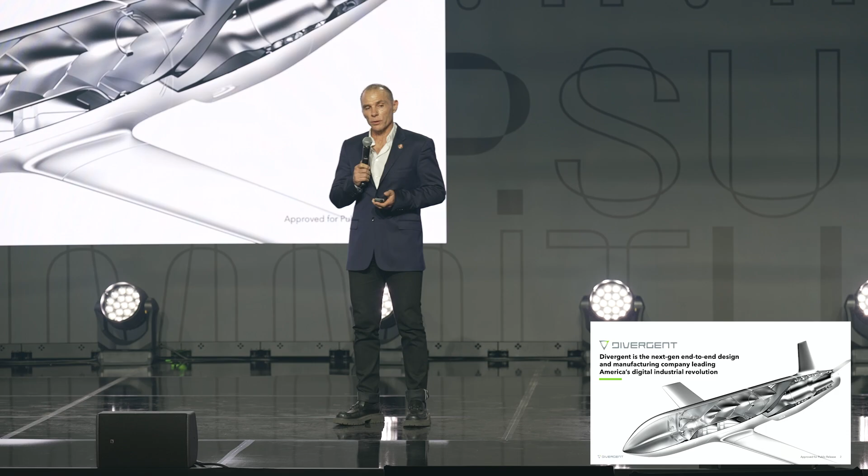It's been commercialized first in automotive with 6 automotive customers that we have: Aston Martin, Bugatti, Ferrari, McLaren, Mercedes-AMG, and Porsche. And today we have, for the most critical safety structures of their cars, structures out on Aston Martins, out on Porsches, and out on Ferraris.

And then all 6 companies will have vehicles out on the road with parts that were generated using a machine learning-based system, fully engineered by that system, 3D printed by machines that we build in-house at a rate that's, I'd say, 10x plus from a cost productivity standpoint better than the most cutting-edge available 3D printing technology.

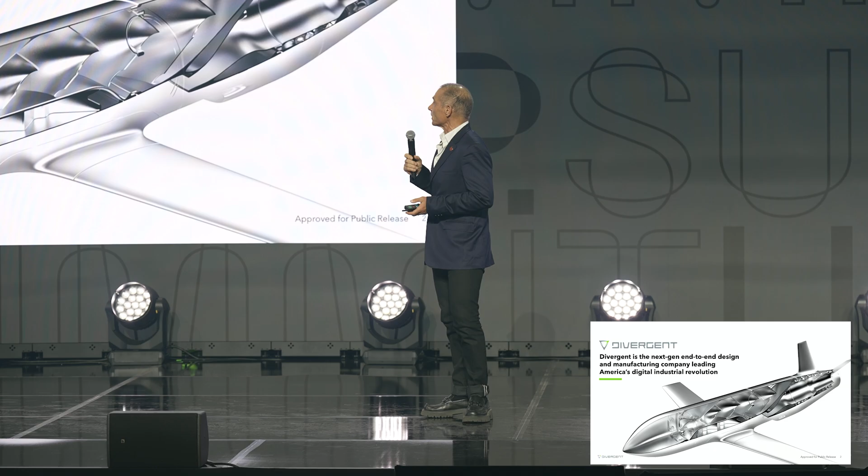And because we design the assembly structure into the structures themselves, we can use the same robotic cell to assemble whatever we print in one end-to-end system. And so Divergent is, in our view, the next generation end-to-end design and manufacturing company that can distribute and scale manufacturing across multiple industries. But our focus really is starting with auto and aerospace and defense.

Recently, we closed a $290 million financing for our Series E. Over a decade, I've raised about $1 billion in capital. It took about $500 million to build the initial system and about another $200 million to commercialize it in automotive.

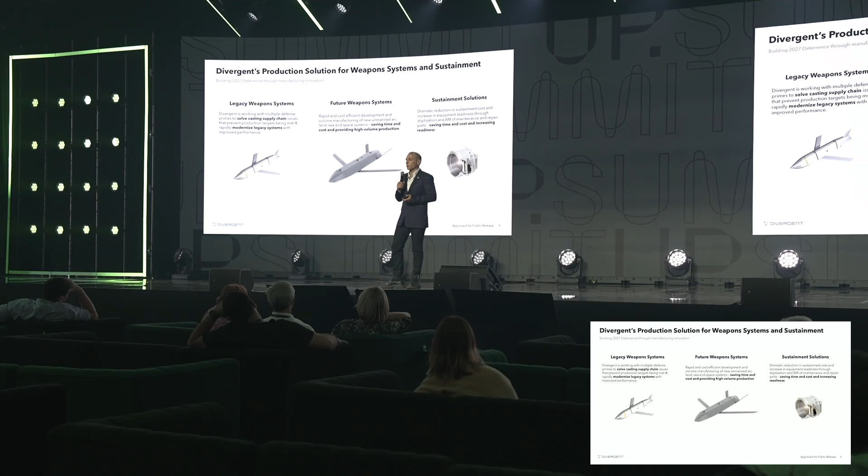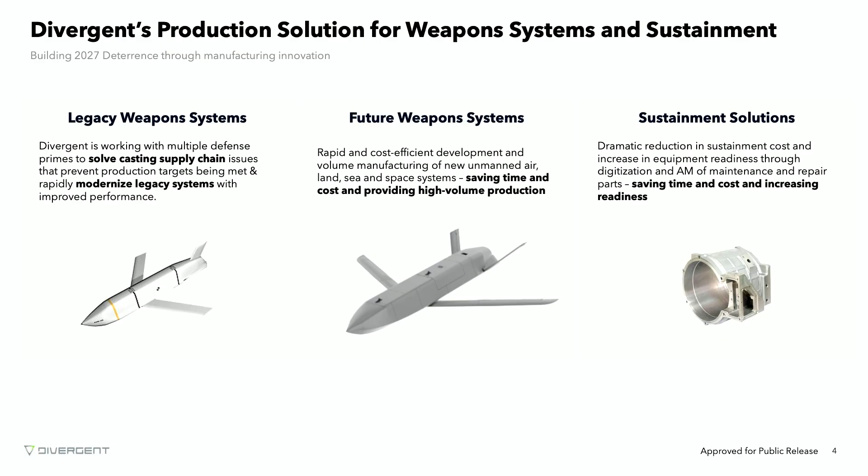We're working across 3 different pillars. One on legacy weapon systems with companies like Lockheed and RTX. We're redesigning existing systems, re-engineering them so that we can, at real volume, then print and scale production of those. On future weapon systems, we're working on unmanned air, land, sea, and space vehicles, some of which I'll show you in a second.

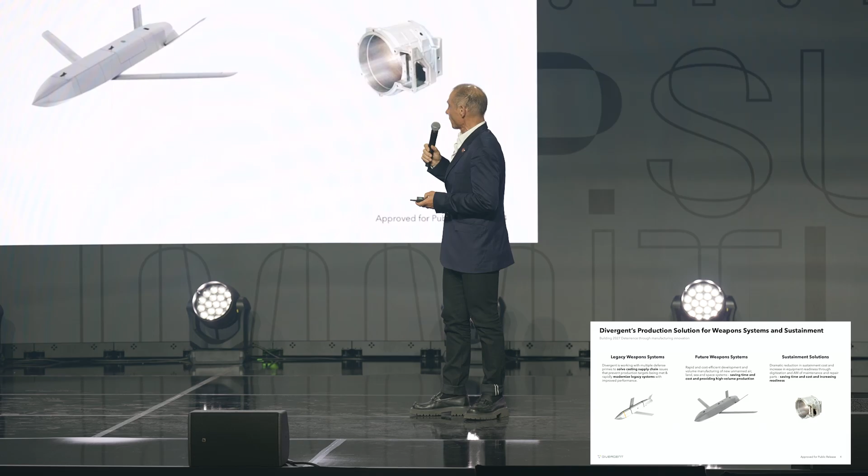And on the sustainment side, obviously there are many, many parts where casting companies that were manufacturing them no longer exist, both here and in our NATO allies where we sold old equipment. We can very, very rapidly, say in 24 to 48 hours, re-engineer those, and then in any machine that we have, be able to produce those in any quantity, from 1 to thousands. So those are the 3 areas we're focused on in aerospace and defense.

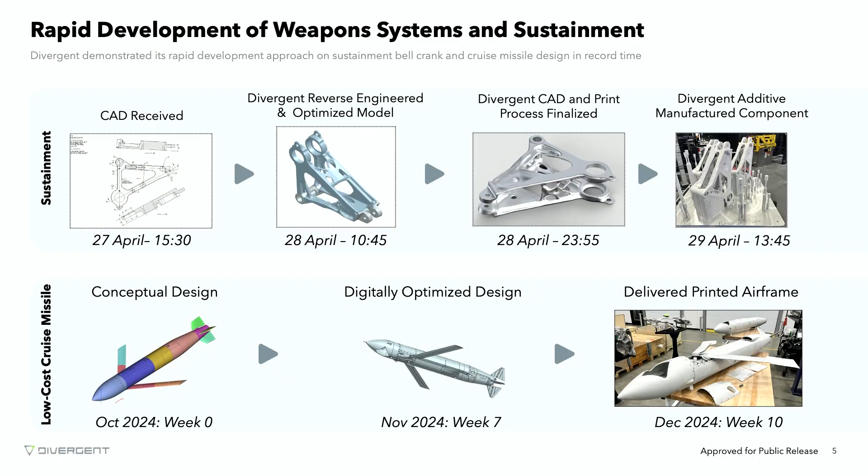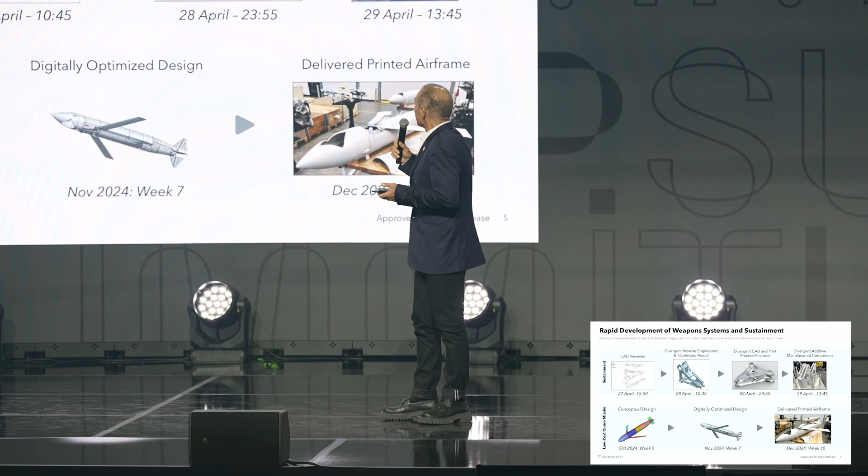These are 2 examples. One on the top is sustainment. So a bell crank for a C-130 tail rudder. They could not find a vendor to cast that over a 3-year period of time. You know, in desperation, AFSOC, Air Force Special Operations Command, came to us. In 1 weekend, we re-engineered that, manufactured, and shipped that to them.

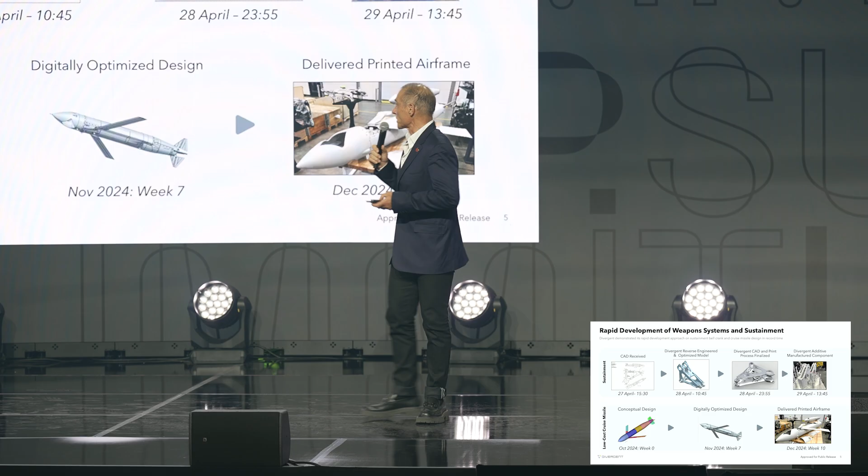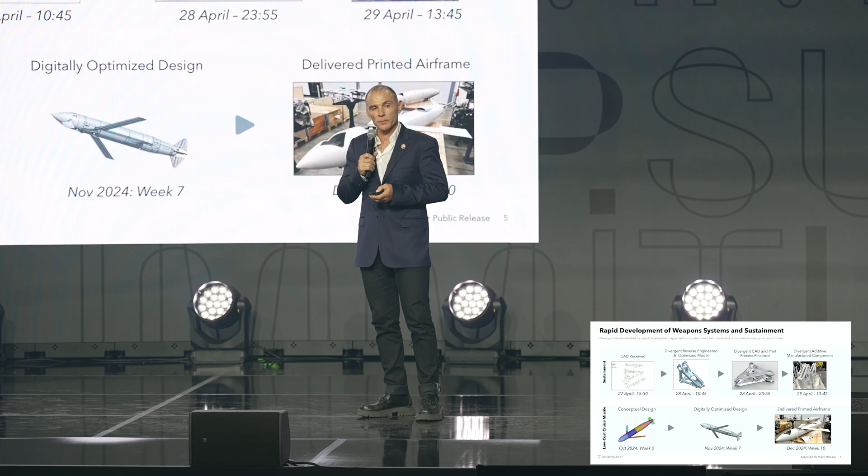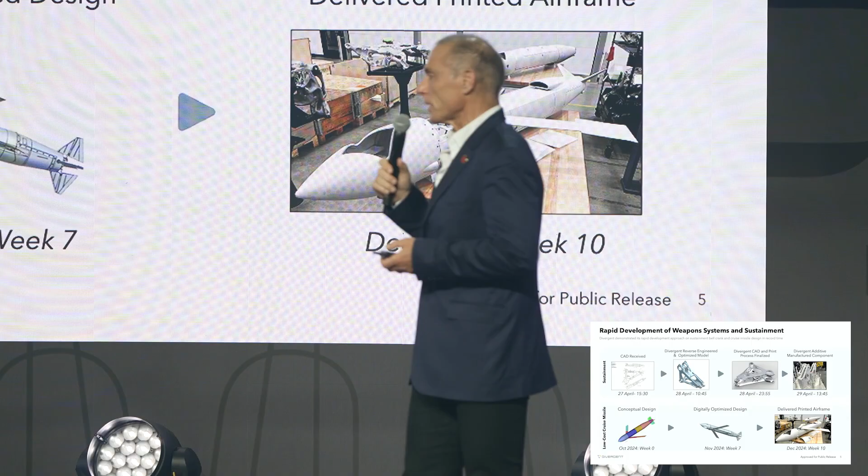As I said, anything that gets generated on the system can be printed and assembled by the same machines. The bottom example is on a low-cost cruise missile system for one of the major primes. From the start of engineering, and usually this is a couple-year timeline, we went from T0 of engineering to delivering a test-ready airframe, and we're doing everything from warhead without the energetics, full missile body, wings, empennage, all generated by an AI-based system and printed and delivered within 10 weeks.

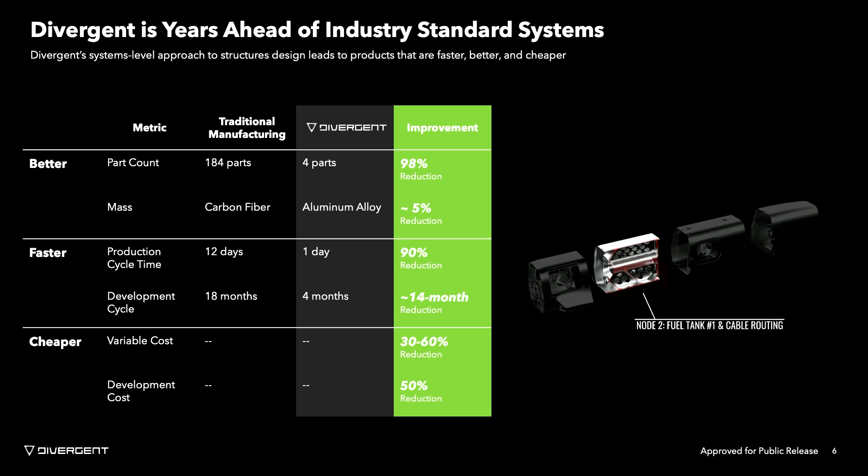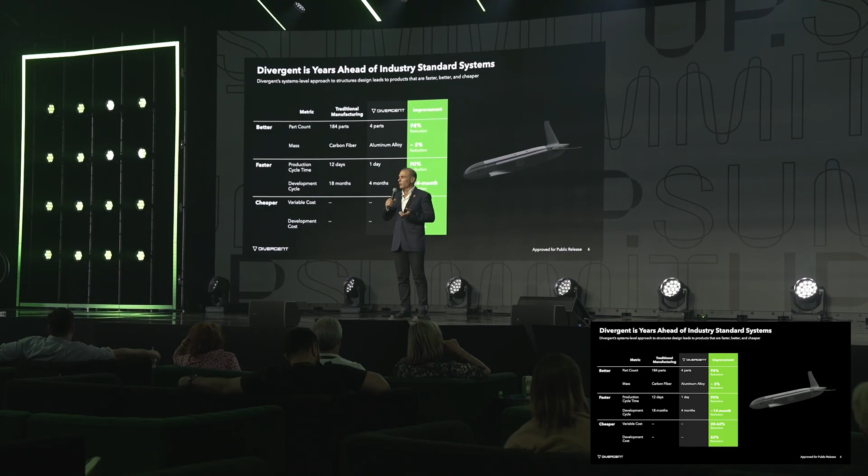So what's the advantage of doing this? This is an example that's actually been published by General Atomics that we did about 2.5 years ago on a smaller unmanned aerial system. We took that system, which had about 184 parts, re-engineered it through our machine learning-based system, and reduced that to 4 parts. So what happens is things like fuel tanks get printed in, the bracketry gets removed, fuel lines get printed in, you massively reduce the number of parts, and if you need to make any changes, literally, it's a couple hours of compute time to do it.

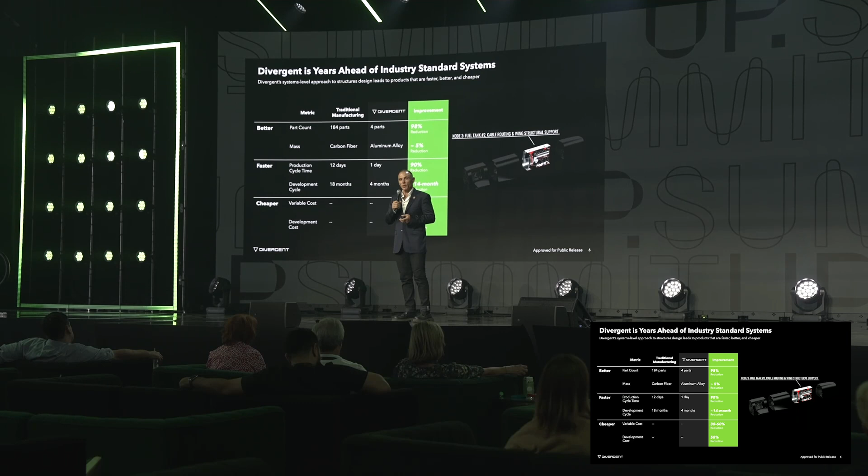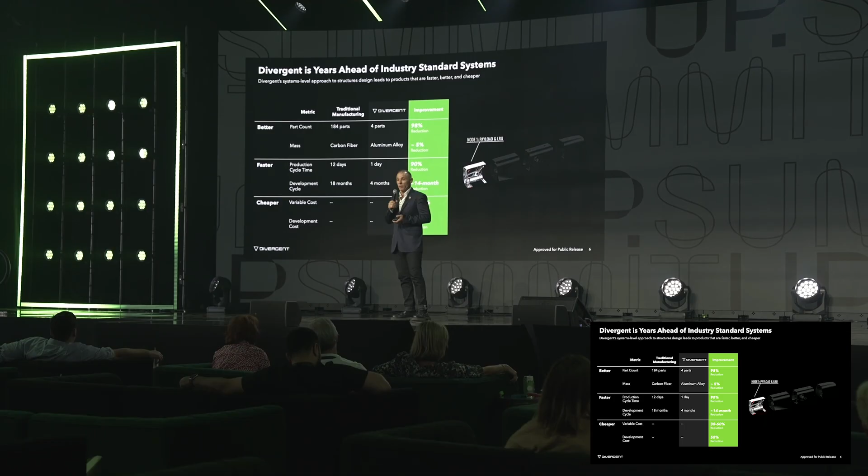Even though we were replacing a carbon fiber outer mold line, we reduced the mass of it. We reduced production cycle time from 12 days to about 1 day. We reduced the development time from 18 months. Now we have it down to 10 weeks. It says 4 months there. And massively reduced variable cost and development cost. So this is actually faster, better, cheaper with a system that's design agnostic.

No more expensive tooling for one product and factory for one product. You rapidly generate, using automated software, the product structure, and then on any machine, you can do any product. Within the first factory we've built in Torrance, California, we're doing about 450 different structures out of the same printers and the same assembly systems.

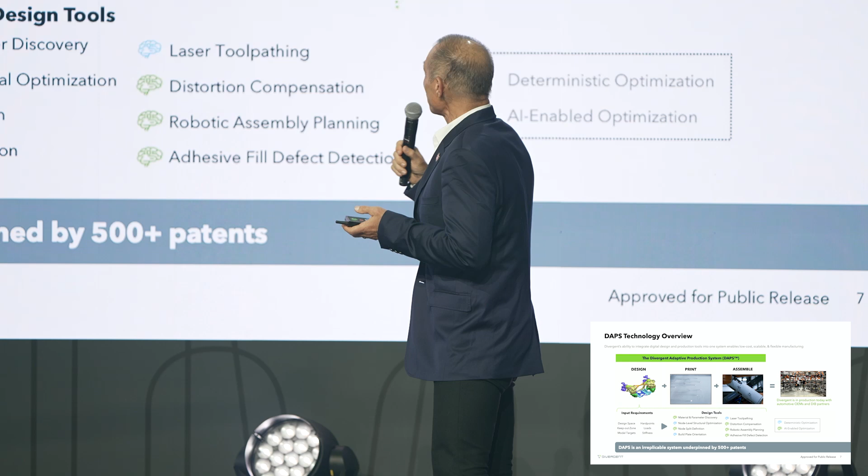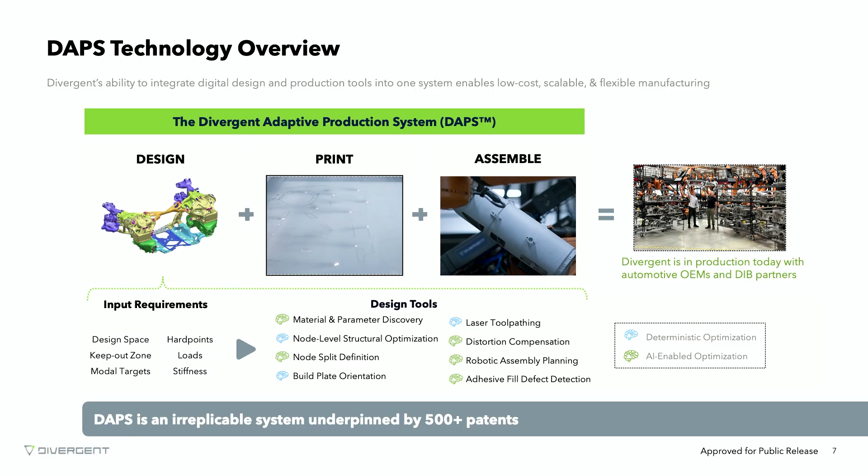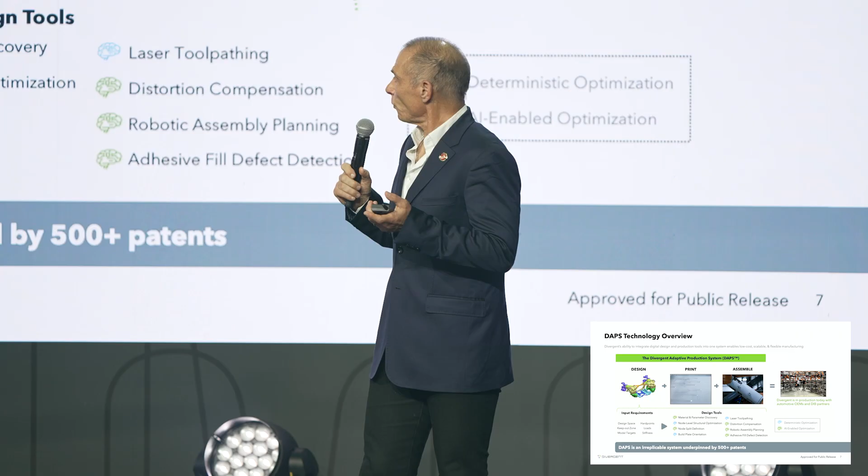This is what the system looks like overall. It's called Divergent Adaptive Production System because it's a machine learning based system. We first software define the architecture. We input a set of requirements. We have a full digital twin of our print and assembly process. So when a structure is optimized, say the rear frame for a hypercar, we not only generate the optimized structure, we generate the optimized printing and assembly instructions.

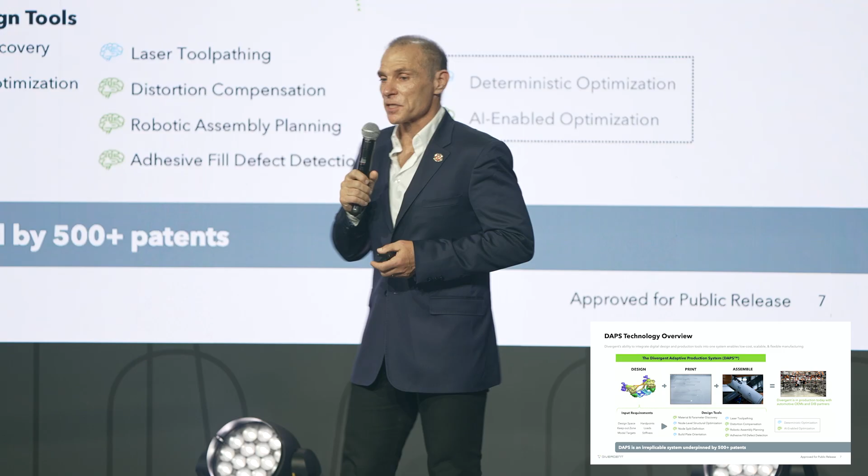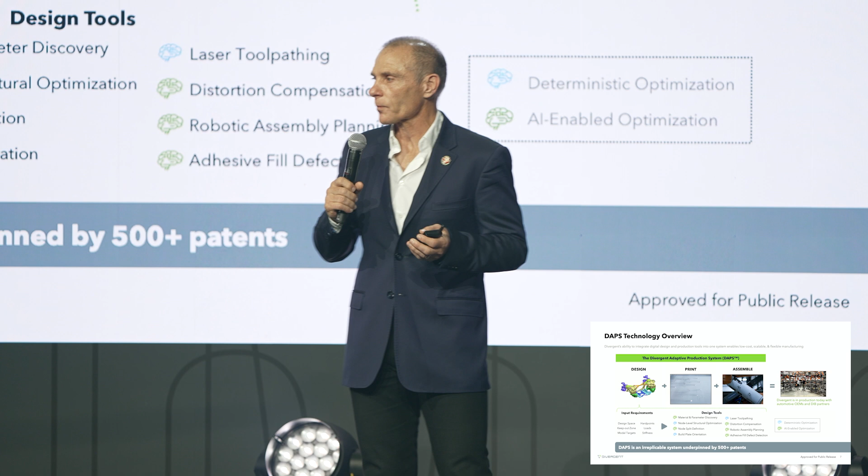Those can immediately be sent to any of the printers we have. Those printers are manufactured by the factory itself as well. We're doing about one a week by the end of this year, and we'll be doing one a day by mid-year next year, building one printer a day to scale up. And then we have an assembly system that I'll show you a video of that allows you to take those printed parts, and because the structure for assembly is in the part, assemble any product off the same assembly system.

And my business partner is my son, who's 31, and this is actually a photo of us with Aston Martin Vantage frames. So we are shipping frames to Aston Martin. Those are the most critical safety performance structures in the cars. Those are out on production Aston Martin Vantages today.

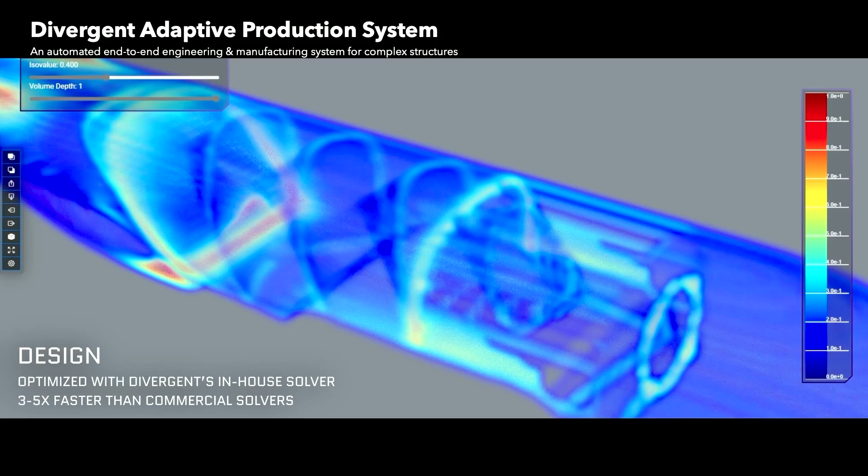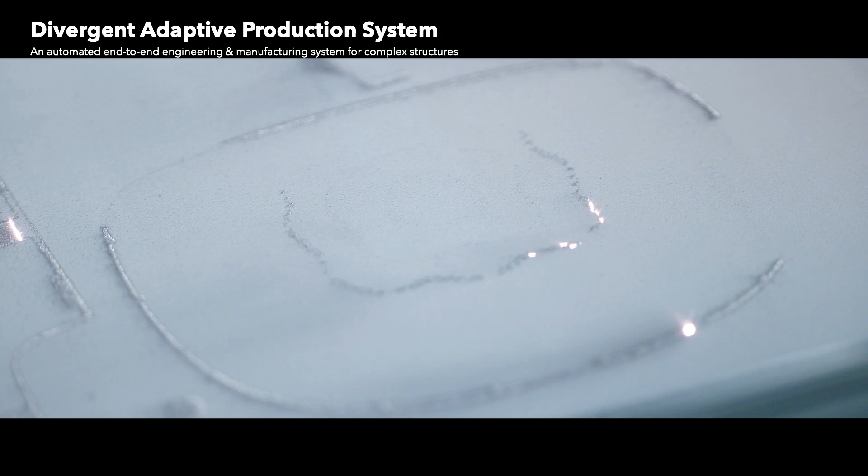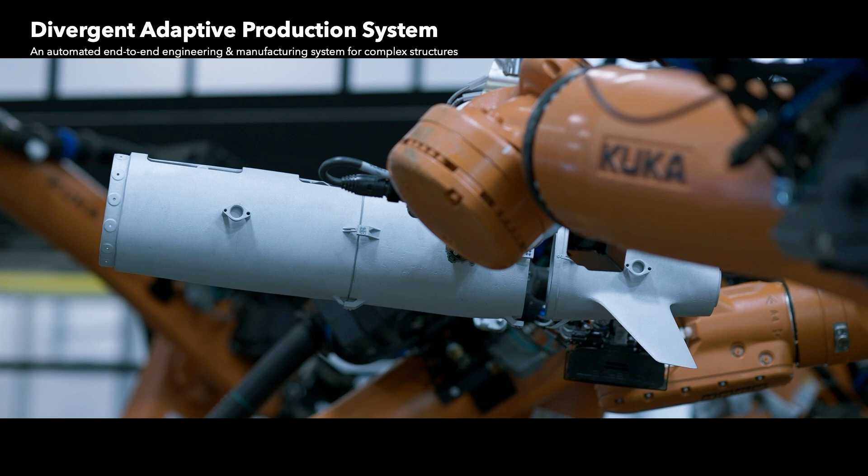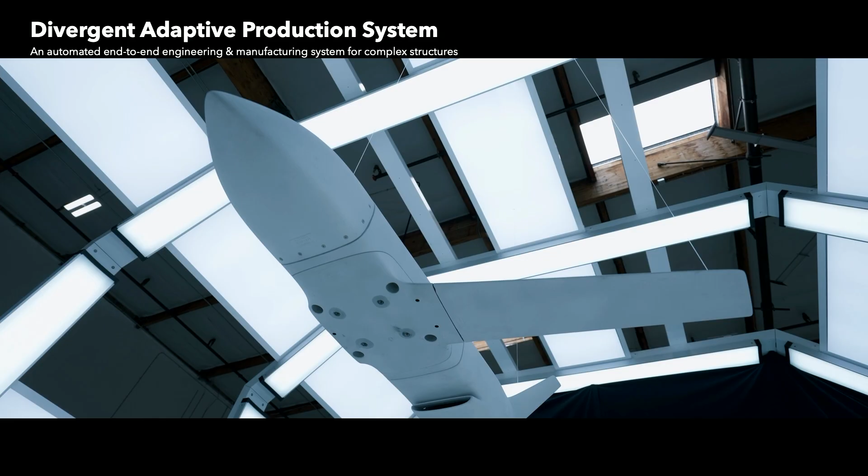So what we're doing is actually acting like a combination of design tools plus, say, a fully digital distributed Foxconn. We do that as an outsourced manufacturer for these companies. We're working with basically every single major prime and a lot of the secondary primes. Within 18 months, we've gotten over 30 production contracts. We're also obviously working on the auto side, so this is a dual-use technology.

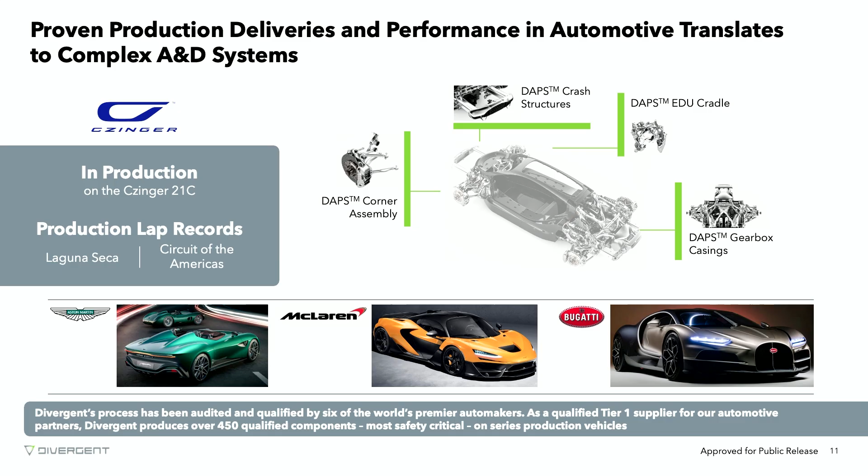Like Cyrus said, we actually have our own captive hypercar company. It's called Czinger Vehicles. We're delivering 80 vehicles over the next year. We've delivered about 15 now. About a month ago, we drove one of our cars off of the assembly line. They're fully homologated, meaning they've been through full crash, full emissions, 50 state emissions.

We drove it to 5 different tracks in California over 5 days, drove it over 1,000 miles, and set every single production track record against the McLaren Sennas, Ferrari F80s, basically smoked every single track record as an American performance car built within 3 years from start to finish and being delivered as a fully homologated vehicle around the world.

So what's the idea? One factory, any product, from small structures all the way up to doing collaborative combat aircraft fuselages, propulsion systems, both internal combustion engines, jet engines, gas turbine jets from 150-pound to 750-pound thrust, rocket motors, rocket tubes, obviously not energetics for warheads, but the warhead itself, not the propellant, but the tube and the motor itself for rockets.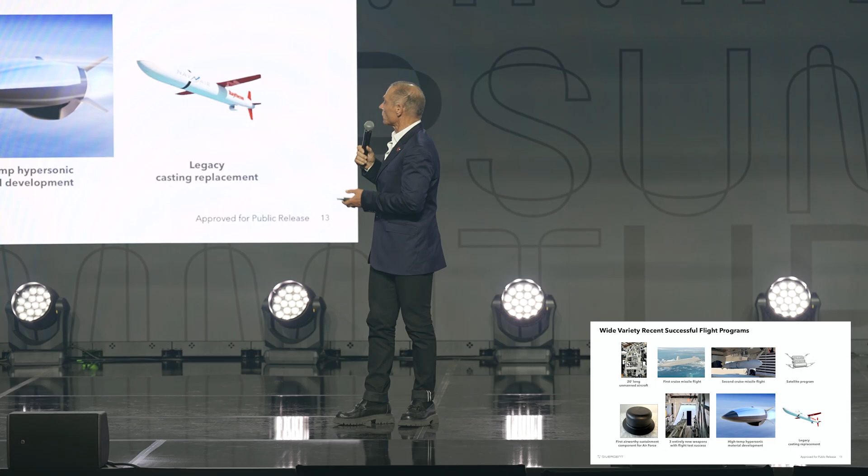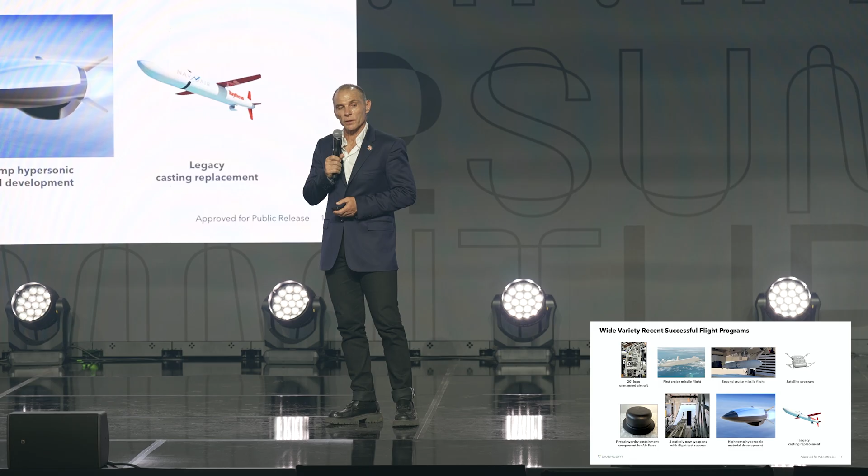As I said, everything from 20 to 30 foot long fuselages, hypersonics, satellite buses, sustainment, all done off of the same generative design software, all done off of the same printer that we've done in-house, all done off of the same assembly system that we've done in-house.

But the real vision for this company is to provide dual use capacity and tools so that in a distributed way, people can design and manufacture without having to put up capital for a single product and put up capital for a factory. And that to us is the only way that the US is going to actually reindustrialize and become a leading manufacturing power again.